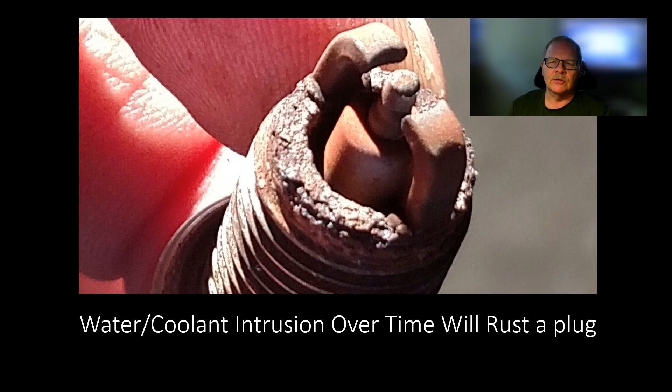That's the reason I took a picture of this plug. And I know it's a strange plug with 2 electrodes, but there's all kinds of funky looking plugs out there nowadays.

But these airbags, I'm going to talk a little bit about those. I've worked on these airbags for a long time, ever since they first came out in the late 80s. They were talking about putting airbags on cars way back in the 70s. And the way they were doing it back then, big clear plastic stuff would come out from under the dash, which was a sort of screwy idea that never really caught on.

But they put the airbags on the steering wheel, right in the middle of it, under the horn button. To start with, when they first started putting airbags, they tried to put the horn buttons on the side. Some of you might remember some of the Fords, like the Crown Victorias. You would have to push on the turn signal stalk to blow the horn. That wasn't airbag related, but it was moving the horn to a place where people didn't like it.

And so they put buttons on the spokes of the steering wheel while the airbag was there. Customers didn't like that. Customers wanted to be able to slam their hand on the middle of the steering wheel. Back in the olden days, there was half a ring on there where you could just get your thumb against it, but it was hooked to the thing in the middle of the wheel.

Well, it's sort of a dumb thing to me to put the airbag right in the middle of the steering wheel when you're going to be sliding into the back of somebody and you're going to lay on your horn, and the airbag's going to light off right into your hand. I have never read about that causing anybody an injury, but I do know that steering wheel airbags can injure people. They're the most prone to injure folks.

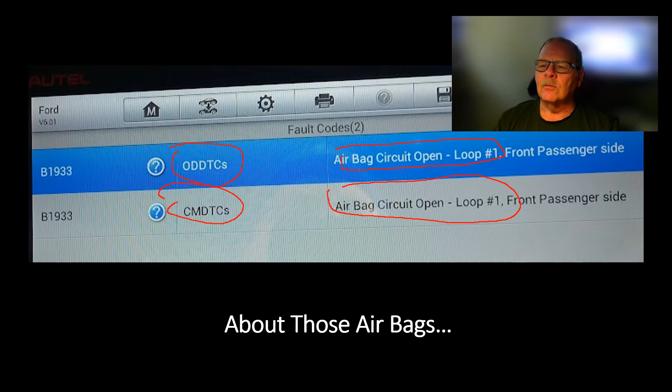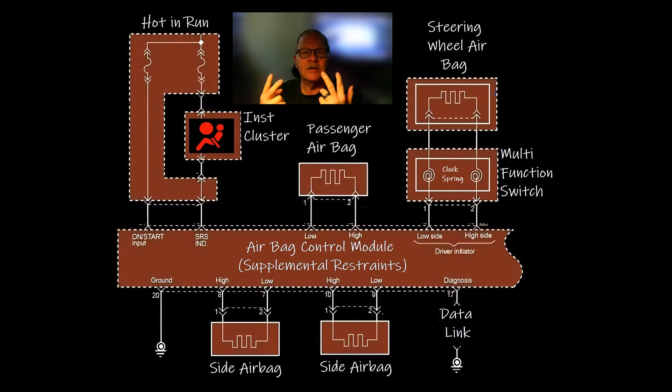And the way they had the airbags fixed up, the airbags wouldn't light off unless both triggered. In other words, you had two different crash sensors. One of them supplied ground, the other one supplied power. You put power and ground to an airbag, it's going to light off. That's why when you unplug the airbag, there's a shorting bar that pops up and shorts out those two wires so that you won't have any static electricity in there.

Now, if you're measuring an airbag, for example if you got a code for this passenger airbag right here, you are not supposed to take a meter and measure the resistance of the heater in this airbag, which is basically a firecracker. It lights off. If you do that, the little bit of current they claim goes from the meter through that airbag could light it off.

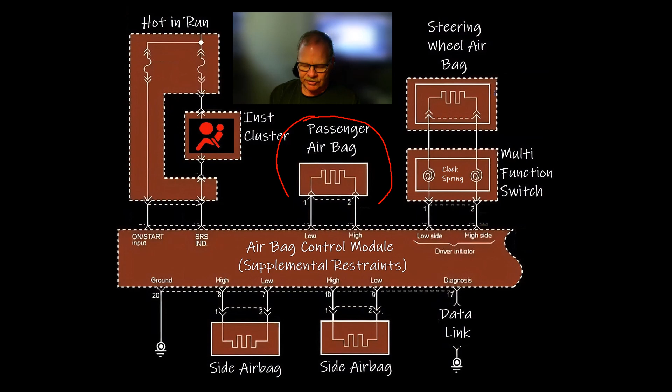Now, whenever I had an airbag I was going to replace anyway, that didn't matter. Like on the Crown Victoria one time, they have these little seat belt tensioners that also have a little firecracker in them, and it basically locks the inertial reel on your seat belt when you have a crash, so it keeps you from going forward. Anyway, I could talk a lot about airbags and those things.

On a Crown Victoria I worked on that belonged to the college, the loop on that little seatbelt tensioner was real similar to one of these. It's only supposed to have a couple of ohms of resistance, and it was not dangerous, because worst case scenario, if you measure it and it lights off that little firecracker, it's not going to mess anything up because you're going to replace it anyway. And it had a code for that.

Now, mostly the wire connectors on these things are gold plated anyway, like a lot of other stuff now. But the circuit loop could have been cut or chewed by a rat or something like that. Whenever I measured it with my meter, I got nothing, right? And since the college was paying for it, when I got the new one out, I measured that one too, and it didn't light off. Now, you can do that if you want to, but if you light one off, it's on you. So I'm telling you, you're not supposed to do that.

Now, let's say you wanted to troubleshoot a code like the one we just saw on the previous slide. What would you do? You would unplug this airbag, get it out of there, and then there's a little dummy load that they sell, or you could actually fabricate one with a 2 ohm resistor.

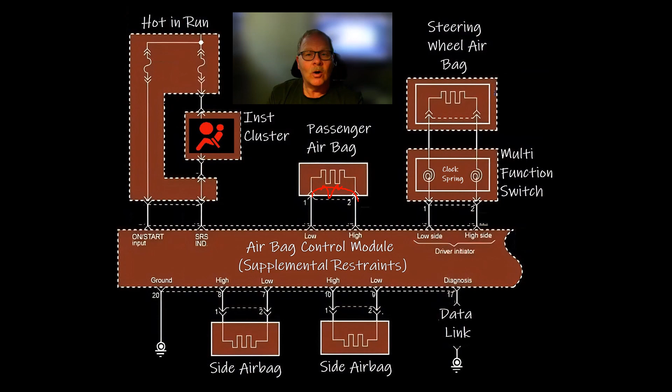Although I did see the little holes in the head gaskets on like a V6 or V8, where the water passages are there to slow the water down so it doesn't go so fast through the head. If it goes through there too fast, it'll burn the engine up because it's not collecting any heat from the head.

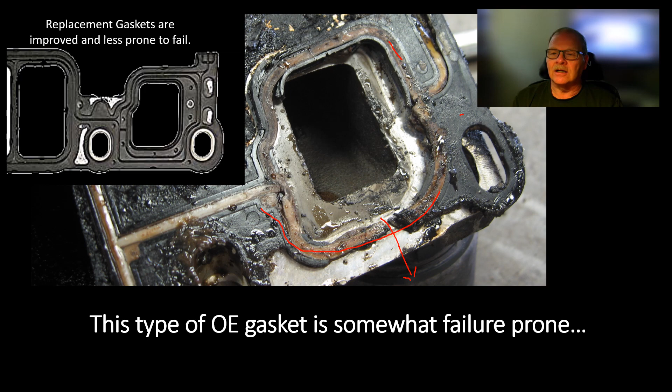Okay, this guy, when he laid them out on the table, he called me over there and he says, look at this. This one has these little holes here. This was the original gasket. The new one has got this full-size cutout that's the same size. And I got a hold of the parts man, he got a hold of Felpro, and they said, do not use those gaskets. Send those back, that's an error, it's a mistake, they never should have been built that way. And then they sent us another set of gaskets that were made the right way. But anyway, gaskets are a lot more complex than a lot of people think they are.

Now this right here, this was one I had a clogged EGR passage on. There's a passage in this one. It was, I think, if I'm not mistaken, on a Pontiac Aztek. And what we needed to do was clean out that passage, go into that EGR valve, and it's got a hole that goes through there kind of crooked and comes out. And it was completely clogged up with stuff. And you can't really get a straight shot in there no kind of way. And I didn't want to have to pull it out and turn it upside down and all that nonsense. So what I did was I used an old park brake cable that we had on hand,

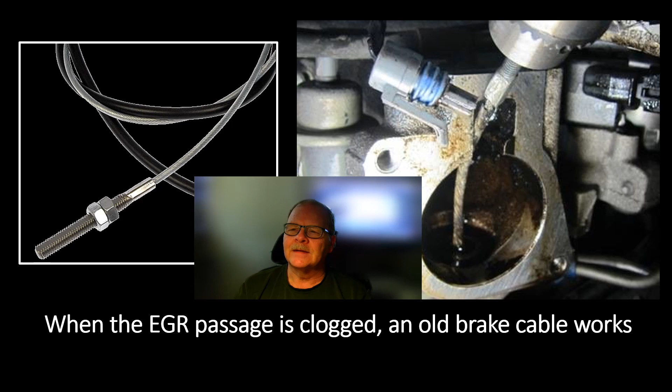cut it off, put this in the drill, you can see that right there, and I kind of whiskered these wires out, kind of like that right there a little bit, and I went down in there driving that with that drill, and it managed to curve right in there and clean that thing out. And I followed up with carburetor cleaner and air, spraying air through there and all that kind of stuff, and we unclogged our EGR, got rid of the P0401. And so that's just a little thing you can do when you're cleaning out one of them holes like that that's hard to get into.

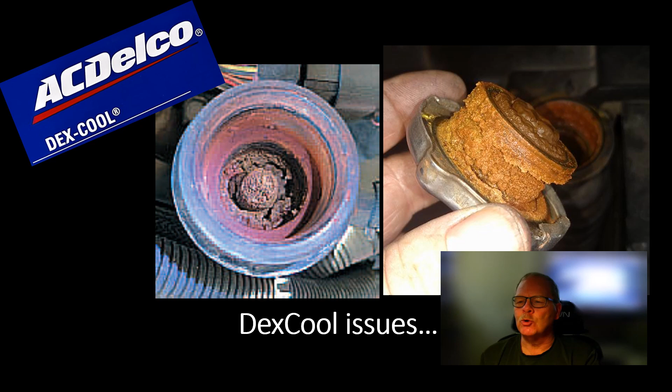All right, now then, Dexcool. I don't know what GM's thing is on this, but it's orange coolant that General Motors like to use. Ford uses it on some of their vehicles too. And it's this same kind of Dexcool stuff. And I'm not going to get into the HOAT and the OAT and all that kind of stuff that people talk about, the organic acid technology coolant or whatever. Basically the orange coolant just really does us a disservice, especially if you service it like you're supposed to.

That's okay, but a lot of people will go a long time without servicing their coolant system. They feel like as long as it's not running hot, their coolant system don't need service. But if you follow the manufacturer specifications on when you're supposed to change your coolant, you're a whole lot better off. Because once all of this rusty crud winds up getting into the engine block and all, it ain't never the same again. That's just all there is to it.

This particular picture that you see right here, if I remember right, was on an 06 Impala. And we kept having to flush this thing out, kept having to flush it out. We would flush it out and we'd get it looking pretty good. And then it would come back and it would have a bunch more of this crud showing up in here. Finally, we managed to replace the radiator and run a whole bunch of flush through the engine block and all that kind of stuff, put a thermostat in it and that kind of thing. So we finally got most of it out of there. But this is what some of them look like when you pull the radiator cap off. Obviously, this cap's going to need to be replaced.

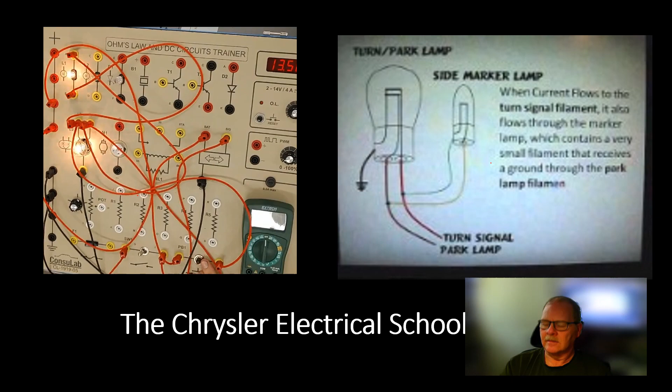So I went to this electrical school in a place in Louisiana. I drove down there, and there was a guy who was training to be an instructor. Him and me and the regular Chrysler instructor were in that same room. And he says, these alternating lights, and this is what I'm talking about right here, that particular one, this one, and that one over there, I can't go back,

but the thing about it is, whenever you turn on your headlights, the front light and the side marker light come on together. There's a video on my YouTube channel about these turn signals, you can look it up. But whenever you turn on your lights, they come on together. But when you turn on your turn signals, they alternate. But if your lights are off, they both flash at the same time.

And the way they do that is, you can see how I had that wired up on that previous slide. The little light has a higher resistance and is actually wired to both of the big filament wires. It's wired to the tail light, and it doesn't go directly to ground. It always has to get a ground through one or the other of those filaments. And so that works really smooth for giving you those alternating lights without having to use a relay.

Well, the guy at the Chrysler school didn't know how that worked, which I thought was very interesting. The instructor didn't know how it worked, so I drew it on the board. I didn't do it with everybody watching, I did it with that one guy so he'd understand it. But I used to horse around at the Ford place doing all that kind of stuff. On my toolbox, I had a little power supply I had built, and I was testing things and firing up ignition, just whatever.

If there weren't some fans to be blown out or mounted, or computer software to be updated, and if there wasn't anything else to do, which I usually tried to do because of the way I got paid, I was always looking after stuff that a lot of people wouldn't touch because they didn't get flagged for it. But because of the way they were paying me, I just did all kinds of stuff other guys wouldn't do.

Now this Ford 500 has been sitting in this same spot, this same way, for about a month. I was noticing this thing sitting there, and for about 6 or 8 months it sat there fully intact. Nobody had taken anything off of it or been working on it, as far as you could tell from the road. But then they started tearing it down. What they're doing here, I do not know, but you can actually look at the way that it's been taken apart, and you can tell that they're just sort of, I don't know if they got their kid working on it, tearing it down just to see if he can figure out how to pull it apart or whatever.

How many times have you ever seen anybody, when they were touting their skill as a mechanic, saying my nephew or my son-in-law or whoever can take a car apart and put it back together from one end to the other? I'm not impressed with that. What I'm impressed with is a guy that can listen to the car and do a little diagnosis, tighten a couple of screws, and maybe replace one part and fix it. That's the good mechanic. And somebody that rips it apart from one end to the other, there's really no point in that unless you're trying to show that you can do it. That's an awful lot of work for no reason. The least amount of work you can do to get that car fixed the right way, so that it won't come back and the customer will be happy, that's what you need to be working on.

But this thing right here, I'm going to keep my eye on this car. It's a Ford 500, like an 05 model. It'll be sitting there for a while. Whenever one gets to this stage, it has been sitting there for 2 or 3 months with the hood up in the rain and everything, I would venture to say, and I'm not a betting man, but you could lay some pretty good money that this car will never run again. And of course, there's a lot of cars sitting around that'll never run again that have never had anything taken off of them. This one here is a train wreck.

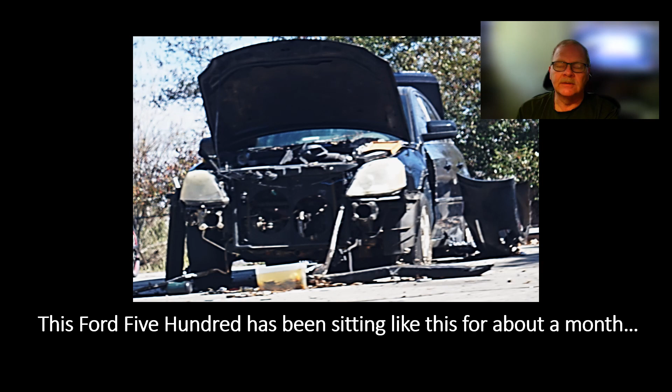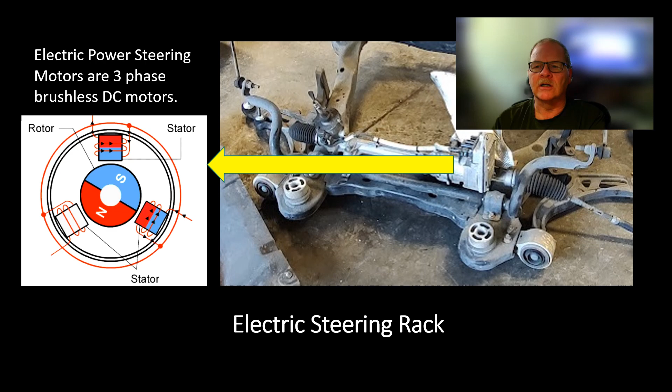Now, I don't know if you've ever noticed the difference in the way a brushless DC motor and a DC motor with brushes works. But let's have a look at this. Basically, what you've got here on this side is the brushless motor. You notice the magnets are on the part that spins. They're on what we would call an armature.

You notice whenever it's shooting juice in there, the ground is around the outside there. Shooting juice in there, it walks it around. It's vaguely similar to a stepper motor that you used to see for your idle air control and various different things. But this is the kind of motor that they use on electric power steering. This is a neat little animation. I found some of these and pulled them together for this. So just keep that in mind.

Me and the boys one time found a little kit that you could buy at Radio Shack where you could wind this thing, make a little commutator, stick a couple of magnets on there, and then whenever you applied power to it, that little armature you built would whirl, and it was very instructional when it came to electric motors, and it taught the boys a whole lot.

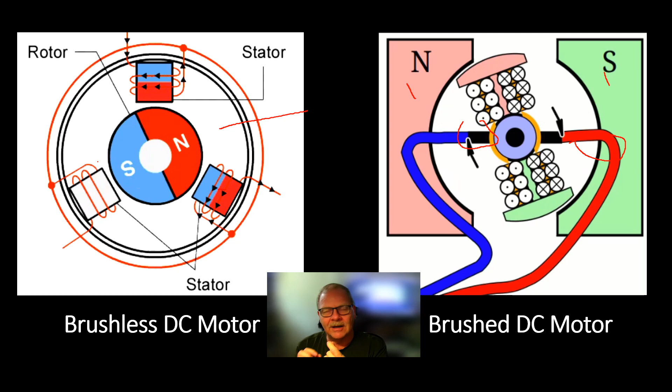One time, whenever the boys were real little, I played with electrical stuff with them all the time, and I had this vehicle speed sensor that came off a Ford, and a little LED that we got from Radio Shack. Well, the vehicle speed sensor makes an alternating sine wave, and it doesn't put out a lot of current. And so I connected the LED to the vehicle speed sensor, and when you spun it with your finger, that little LED would light up.

And Matt says, okay, let's see. And I had a bunch of little electrical components over here. He said, why don't we figure out a way to connect this electric motor to this vehicle speed sensor with that LED, and then we can hook a battery to the motor to run the motor, and it'll spin the speed sensor, and the little light will stay on all the time.

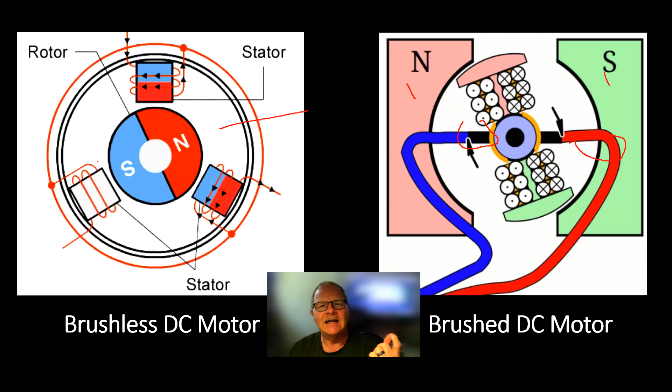And I said, well, that's okay, but it's a bunch of unnecessary hardware. If your objective is to get the light to stay on, why don't you just hook the battery to the LED instead of having that motor and that sensor in between? It was kind of funny. He was overthinking it, basically.

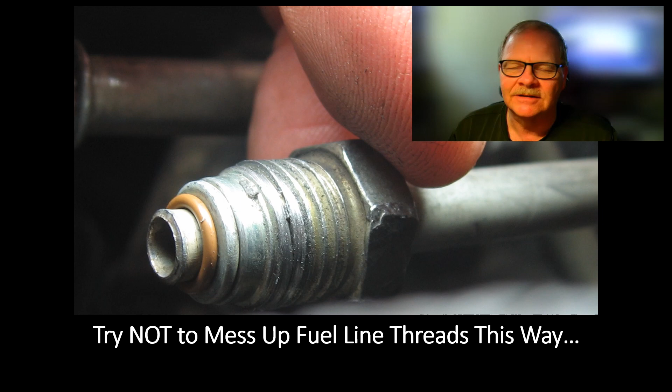Now, anybody that messes up a fuel line like this, this is on a GM, one of them CSFI, you know how aggravating some of those fuel lines can be. If this pipe is not perfectly straight or lined up perfectly with the fitting it's supposed to screw into, and they just try to crank it in there with a wrench, the threads will get badly screwed up, just like you see right here.

And look at the way this thing is made. This is not just something you can throw another flare nut on. You're going to have to replace that whole line. Now, you might be able to take a line off something else, or find a repair kit somebody sells, and maybe on this, because it's only carrying fuel with not very much pressure, maybe 60 pounds, maybe 70 tops, you could use a copper tubing union on this.

It ain't like working on a brake line where you're not supposed to use a copper tubing union because they've got 2,000 or 3,000 pounds of pressure on them when you do a panic stop. But whenever I had a student that did something like this, I would have a serious talk with them. I'd say, look how much time and money you've cost. If you've messed up the thing you're screwing it into, then that's going to have to be replaced too. This never should have happened. It was incompetence and being in a hurry.

Anytime you get in a hurry, wanting to try to get something done, just to scramble along, try to get through with it because you're just wanting to be done with the job, somebody else needs to be doing the work. And that's what happened here. This one here got really seriously messed up by the guy that just figured he'd try to force it in there. But as it was, he just made a mess out of it, and we had to replace his

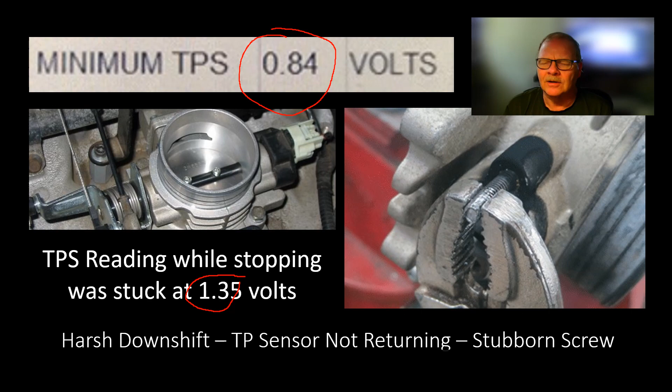It's really impressive to somebody whenever you've got this stuff going on while you're driving down the road. Of course, my dad always would tell me that's the kind of thing you look at while you're having an accident, because it takes your eyes off the road. But anyway, I just thought I would mention that.

I've got this on my Explorer. And I used the GPS when I went to Sarasota a few weeks ago, and it worked real good, and I didn't have any problem. It'll even tell you where the red lights are. It'll tell you when a red light is coming up and all that. And it's pretty darn handy for that.

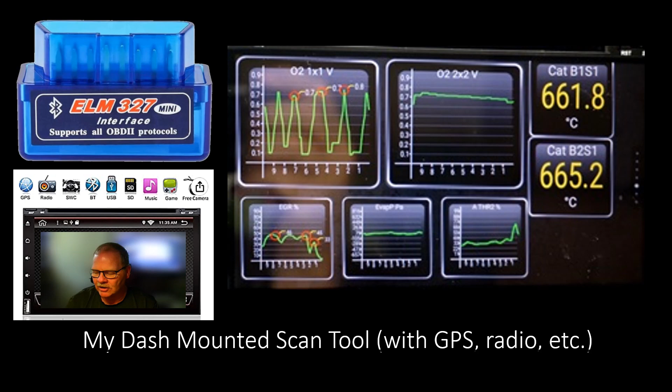But anyway, this little ELM 327, if you look that up, you can buy this particular one for $10 on Amazon, and then you can download the Torque app for your phone. And you can get a screen like this on your phone, and it'll pull codes and do all kinds of cool stuff. I just wanted to give that little thing a shout out.

Now this right here was my 69 LTD that I bought for $950 when I was in high school. Before that, I had driven a 65, the 65 with the stacked headlights. Now you got to remember, this car, whenever I bought it for $950, was only 4 years old. Okay, so 4, maybe 5 years old. How much would a 5-year-old car cost you now?

And what I liked about this was it was made like a cockpit. The dash, everything was here. The radio was right here. Now this one just had an AM radio, because a lot of FM wasn't really a thing back then very much. It was coming on. But I bought an FM converter.

I mounted it down here underneath this, and it basically plays through your AM radio. And you got perfect, beautiful FM sound. So you didn't have to hook up a lot of speakers or anything. You just basically connected this to power, and then you hooked up the antenna wire to the back of your radio, and it plays through the AM radio, but the AM radio's got to be on a particular frequency.

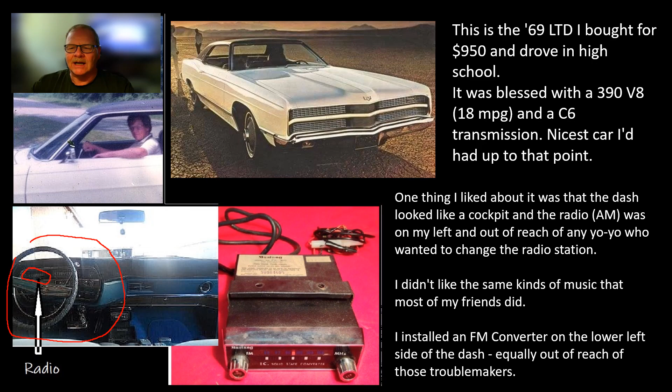But the long and the short of it is, this is pretty darn nice. And what I liked about it, with these troublemaking yo-yos that used to ride with me that didn't like to listen to the same kind of music I did, you know, if you're riding where the radio's in the middle of the dash where they could reach it, they were always jacking around with the radio trying to find their music. They couldn't get to my radio because it was way over here on the left side. And so I just really appreciated the fact that everything was real personalized, and right over there and all that.

Of course, I enjoy doing live work in my automotive program. A lot of automotive programs don't do live work, and that's their business. I'm not going to say everybody ought to do live work, but my students learn more doing live work than they ever did working on trainer cars. And so I had these guys put this motor in here. When they take it seriously, you'll be surprised how careful they are not to leave things loose.

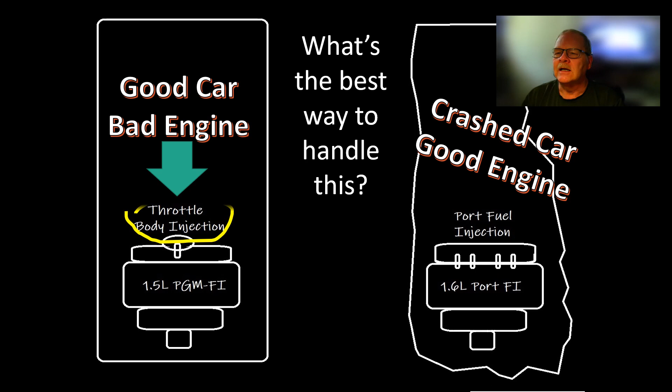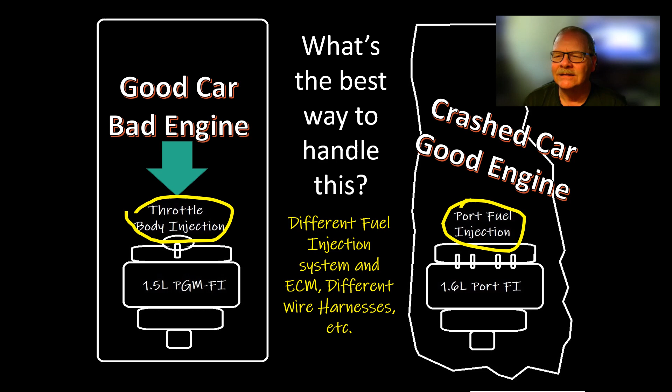All right, so here we had a good car with a bad engine and a crash car with a good engine. But look, this has got the 1.5 PGM-FI with throttle body injection on it, and this has got port fuel injection. And so I asked my students when we first got this, how are we going to handle this? And they said, well, I guess we're going to pull all the wire harnesses and the engine controller and all that out of the yellow car and put it in the blue one. And I said, no, we're not going to do that. We got a better way of handling this. We're going to pull both engines out and get them sitting on the floor.

Actually, if you get right down to it, we didn't pull them out before we did it. We laid the intake manifold back, and we laid the exhaust manifold forward, and we brought the motor out of there. And when we got the motor out, we went ahead and bolted it all back up, put the good engine in the good car.

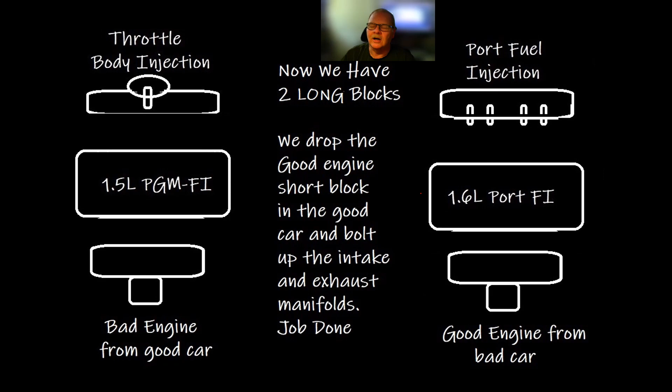But what we wound up doing was we fixed that doggone thing, and that guy wound up with a really nice ride for about $400. Of course, we don't charge any labor, and by the time the smoke cleared and we got everything done, he drove out of there happy as a lark. Now he drove out of there with a 1.6 that had throttle body injection instead of a 1.6 with multi-point, but he couldn't care less about that. He just wanted the fuel economy.